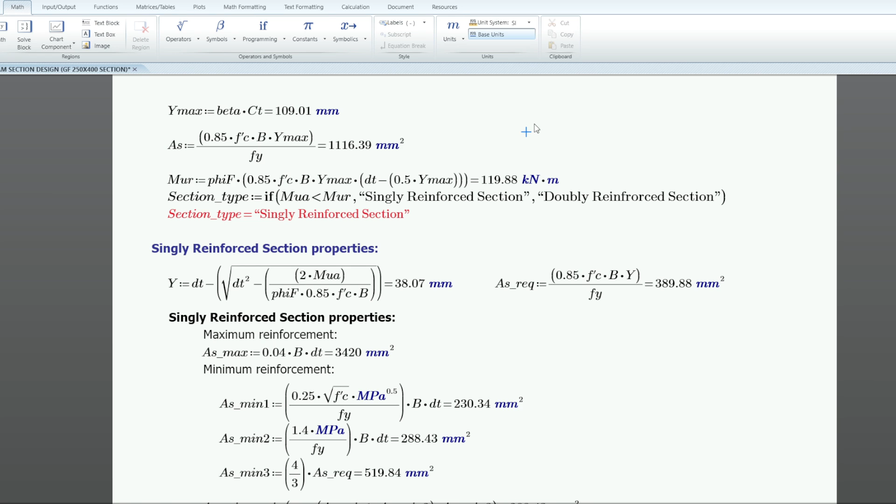So this is the phi, the reduction factor of flexures. Times natin yung 0.85 f'c times B times Ymax. Then, of course, the difference of this value, dt minus 0.5 the Ymax. So ito yung 119.88 kilonewton meter.

Then para natin ma-check yung section type, kailangan natin makuha yung MUR, which is ito. Then i-compare natin sa MUA, which is the actual applied load. If the MUR is greater than MUA, singly siya.

Pero kapag yung MUR na yan, ginanyan ko lang yan, dalawang condition. Kasi nga, nakasingle lang tayo. Pero kapag i-calculate natin yung doble, dapat tatlo yan.

Kasi dapat yung MUA na yan, kapag yung MUA value is within the limit of the MUR, tapos may MU max pa yan eh. MU max, doble siya. Pero kung mag-greater than sa MU max, ibig sabihin, failed na yung section mo.

But for this tutorial, singly reinforced section tayo. Okay, ayan, so every time automatic yan, yung section type natin, mag-update yan, singly or doubly. Okay, para sa singly reinforced section properties, so ito yung formula natin.

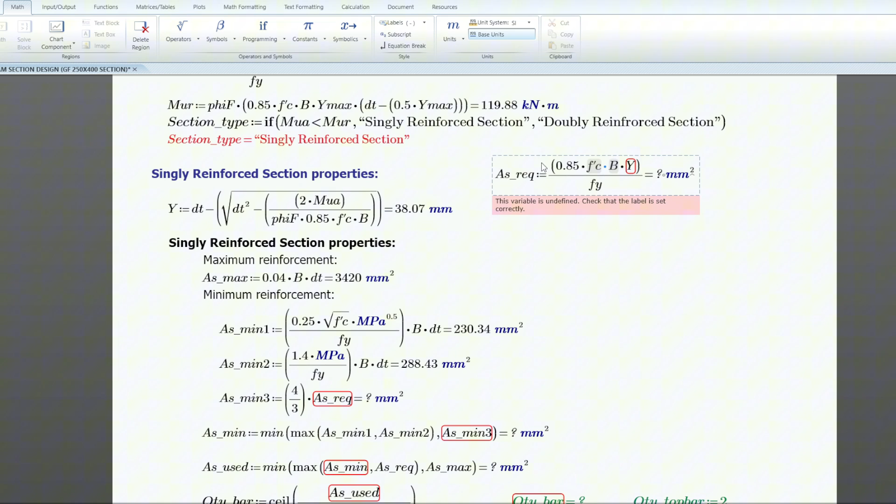For example, for this As required, kapag ilagay ko to, hindi siya makakalculate kaagad. Kasi nga, mas nauna siya compared dito sa Y. So dapat magkasunod siya or sa baba pa siya nakalagay.

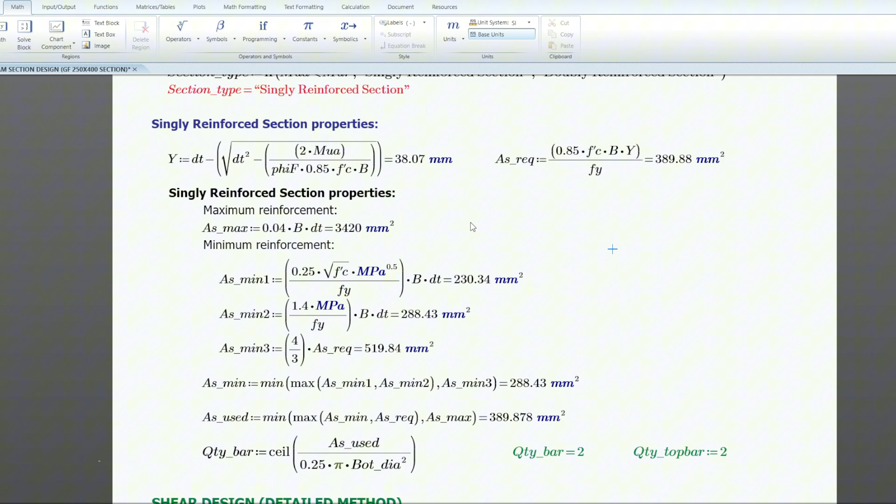Para mag-auto-calculate siya. Now para sa reinforcement properties, for the maximum area of steel in singly reinforced section, of course, four percent yan ng effective area. Okay, then the minimum, of course, is for the ACI. Mayroon tayong tatlong minimum yan.

Isang minimum natin is 25% ng the square root of f'c over the Fy. So as you can see, mayroon tayo dito, nilagay ko siya megapascal raised to 0.5. Kasi originally, wala to eh, wala yan sa formula. Pero alam naman natin na f'c is megapascal.

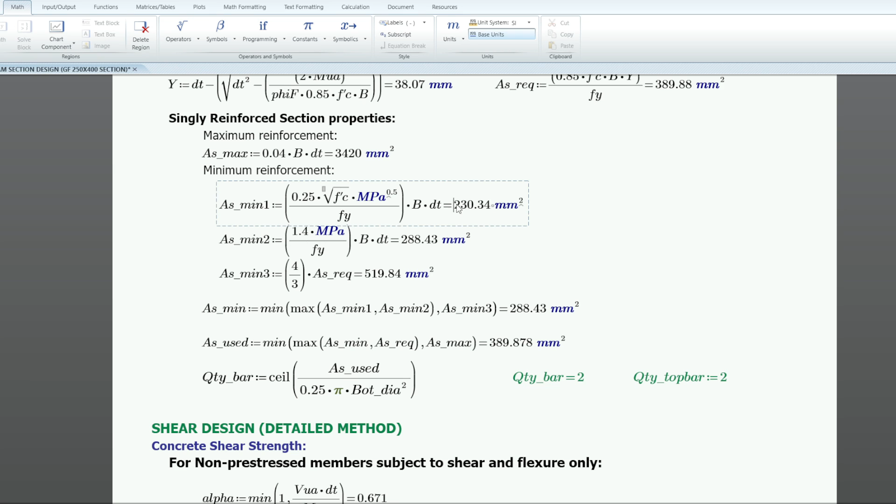So kapag ano natin yan, iba yung magiging result. So kailangan natin mag-introduce ng units para makuha natin yung tamang result. Okay, pero hindi natin yan ina-alter. Ito talaga yung actual na unit niya. Hindi lang naka-indicate dun sa original equation na kinakopy natin.

Then para sa As-min, the minimum bars is 1.4 over Fy. Then lagyan natin yung MPa para maging mm² yung result natin. Then ito pa pala, product of B and DT. Okay?

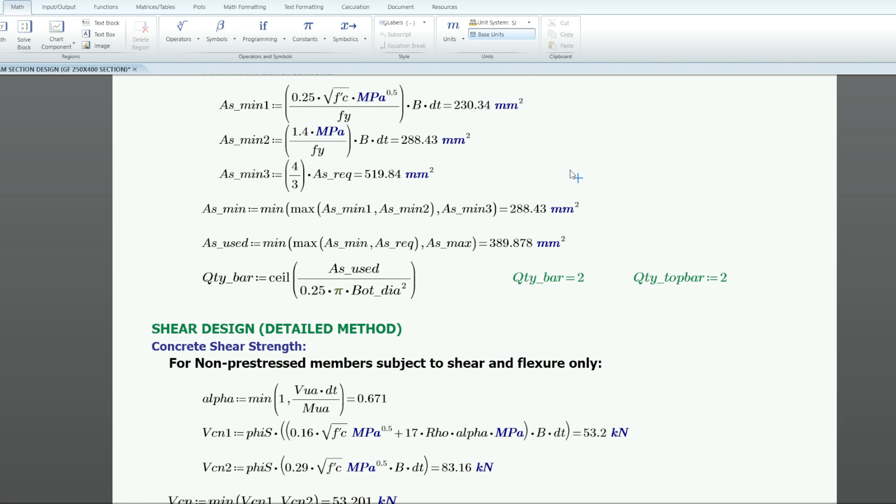The other minimum rebar is the 4/3 of the required area. Then para makuha natin yung ES-min or the minimum reinforcement, that is the maximum or the minimum of the As minimum 1 and As minimum 2. So kapag makuha natin yung maximum dyan, kukunin naman natin yung minimum ng value na yan then sa As minimum 3.

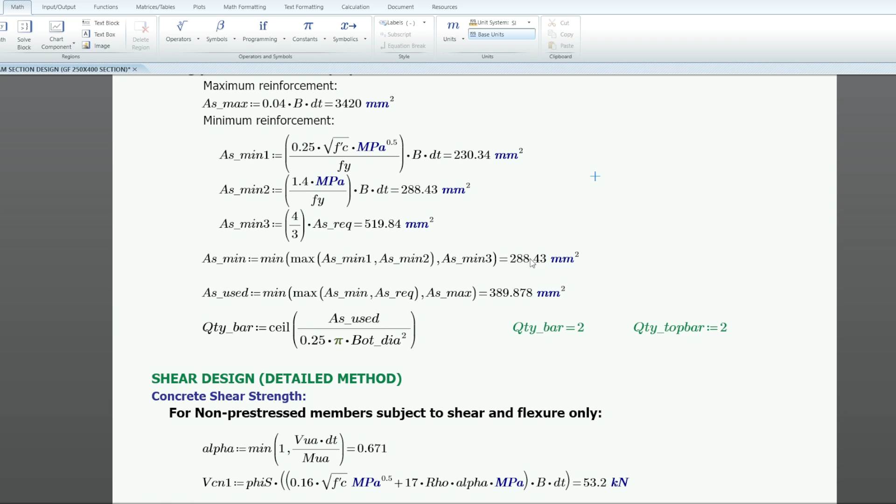So kapag ma-check na natin yan, maglalagay na tayo kung anong gagamitin natin. So i-set na naman natin yung maximum and minimum reinforcement and compared to the required reinforcement, kukunin natin yung maximum ng As-min and As required. Then after that, kukunin natin yung minimum of the maximum of this value and the As max.

Okay, then makuha na natin yung quantity ng bakal sa tension part. So para makuha natin, divide lang yan, yung As_used over the area of the diameter na bakal. Area ng bakal natin na gagamitin. This is the formula ceil para makuha natin yung round up whole number.

So as you can see, ito naka-equal kasi nga naka-formula na tayo rito, naka-semicolon, colon equals. So kapag i-copy ko to, kahit saan mo siya gamitin, equal na lang ang ilalagay mo. Palagi may value na yan.

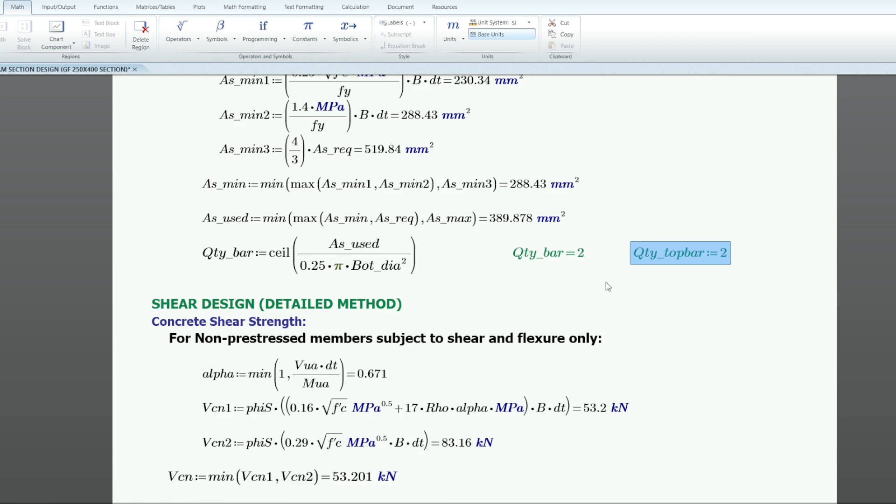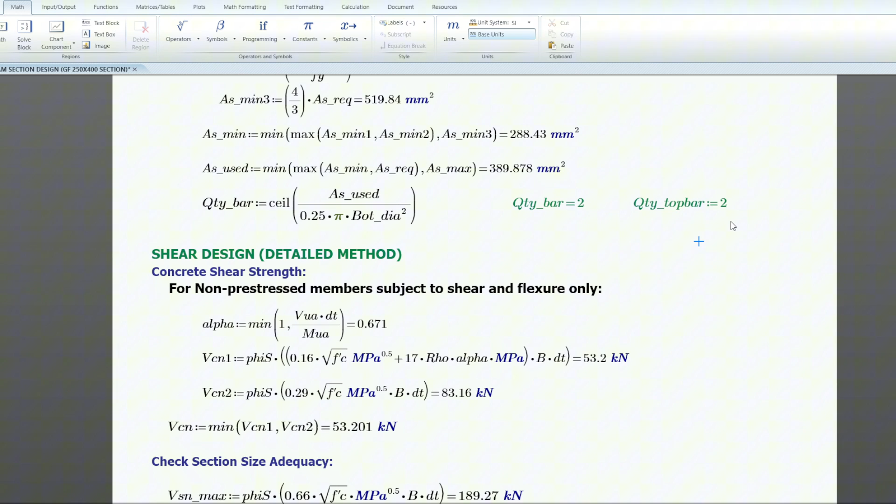Okay, so ito kasi yung top bars natin, nilagay ko lang siya. Then mapapansin ninyo, naka-colon equal pa siya, ibig sabihin first time yan na ginamit. Okay, so originally, this is only our result, yung 2 bars na requirement. So nilagyan ko na lang ng top bars para sa minimum na number of bars ng bawat section.

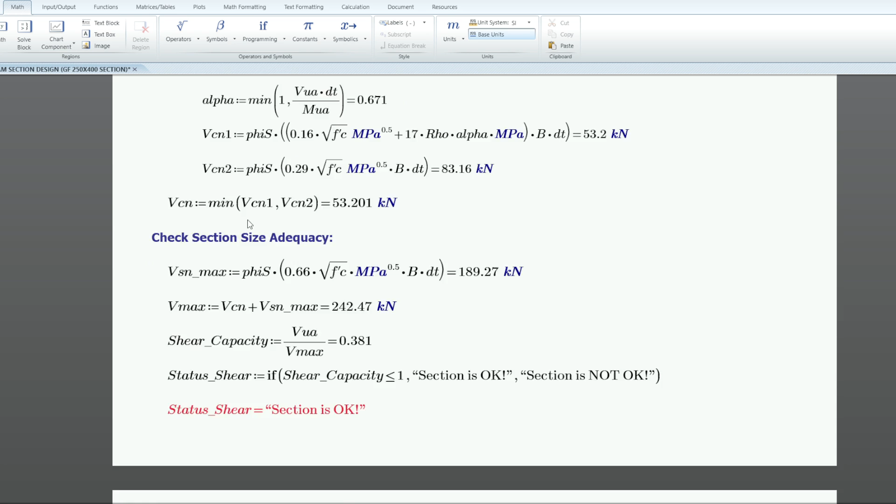And of course, para sa shear design, gagamitin natin is the detailed method. So may isang method pa yung simplified method. Instead na gagamitin yung MUA, then the steel ratio, direct lang yung pure, sinasabi nilang pure shear lang.

Okay, for the non-prestressed member subject to shear and flexures only, ito yung magiging VCN natin, the capacity of the concrete, which is the minimum of the VCN1 and VCN2.

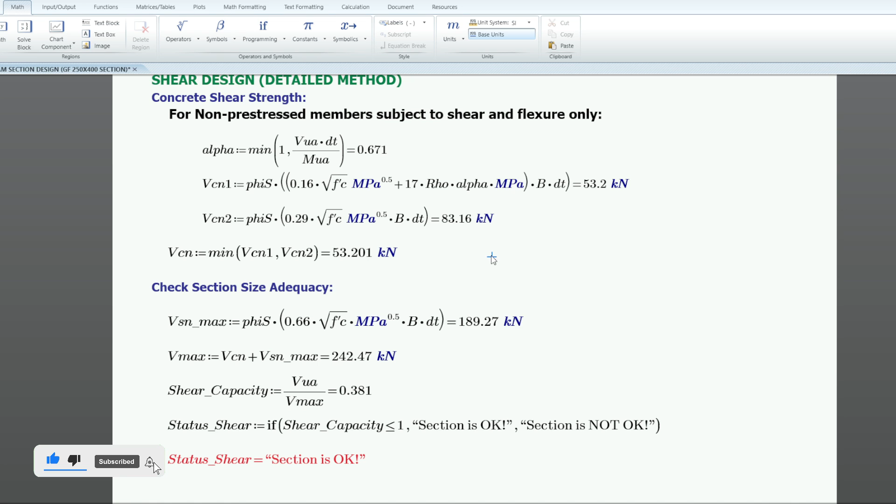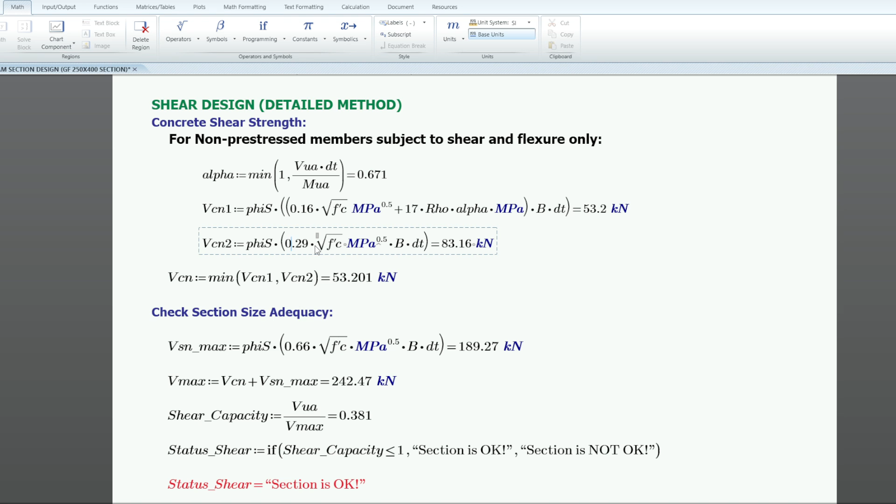And yung VCN1 natin is the reduction factor of the shear times 0.16 times the square root of f'c plus 17 times rho alpha times BD. Then yung VCN2 naman natin is the reduction factor of the shear times 0.29 times the square root of f'c times BD, and this is the result. Then kukunin natin yung minimum ng dalawa, ang VCN1 and VCN2.

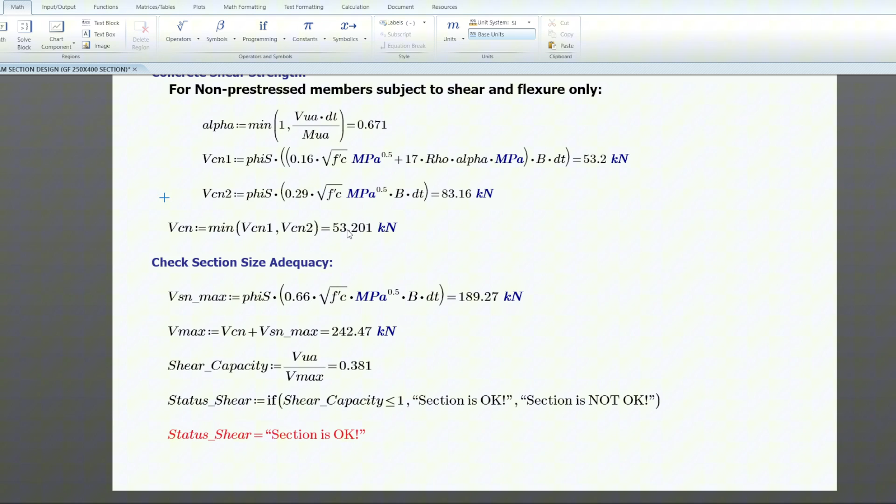Then check natin yung section adequacy of our member. So ito yung VSN max, kukunin natin yan, and makukuha na natin yung maximum shear na pwede magamit natin. So VCN plus the VSN max. So ito na yung maximum natin.

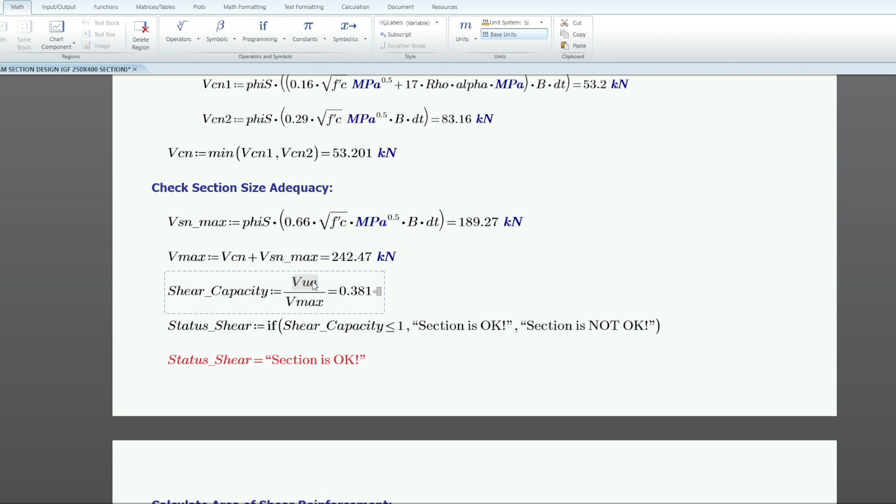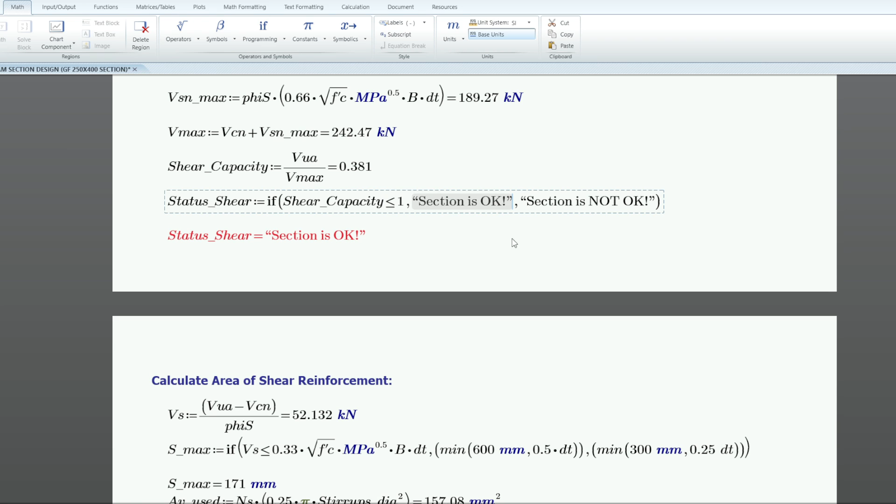Then, of course, the shear capacity, i-divide natin yung shear applied load over the Vmax. Then ito yung capacity natin, capacity ratio ng shear. Then of course mag-status tayo. If the shear capacity is less than or equal sa 1, okay yung section natin. Pero kung hindi, not okay siya.

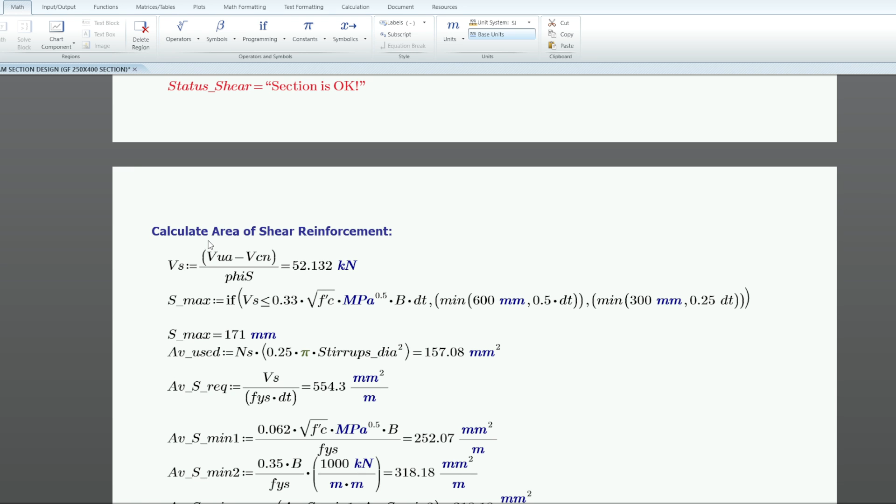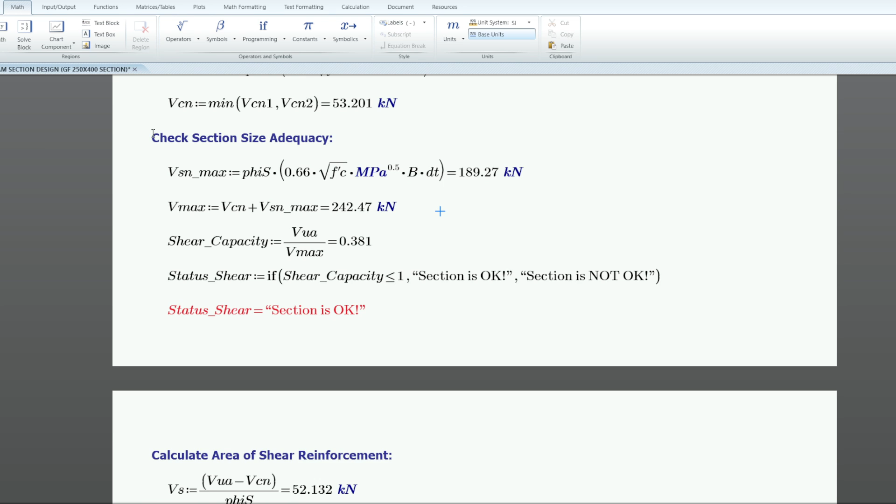Then, calculate the area of shear reinforcement, Vs. So kung mapapansin natin dito is 242.47. Yung VUA natin, anong value? Equals... so 92 lang yung VUA. So ibig sabihin, kayang-kaya na i-carry ng concrete natin yung shears.

Pero papasok pa rin tayo dito sa minimum as per the code. So pero check pa rin natin yung minimum and maximum reinforcement. So kapag i-minus natin to,

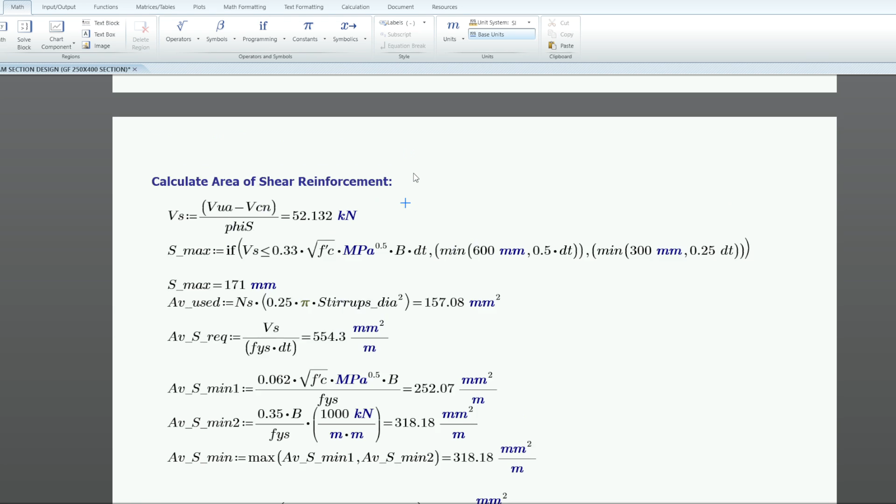Vcn, meron pa rin. Kung titingnan natin yung Vs para sa steel, yung BCN natin, tingnan natin yung Vcn. Ang Vcn natin is 53. Tama. Then VUA, check natin kung mas malaki pa to. Pag mas malaki yung VUA sa concrete strength, ayun, mas malaki nga yung VUA. So ima-minus natin yan para makuha natin yung shear na i-carry ng reinforcement. So 52.13 to. Then i-check natin yung maximum na spacing.

So if Vs daw is less than or equal sa 0.33 the square root of f prime c times B dt, minimum ng 600 at 0.5 times the effective depth ang gagamitin natin. Okay? If not, minimum ng 300 at D over 4 yung gagamitin natin. So therefore yung S max natin is 171 mm.

So yung Av used natin, so of course, quantity lang yan times the area of the diameter of the stirrups. Ito na yan. This is Ns, this is the number of the legs. Okay? Then para natin makuha yung area required in terms of millimeter squared per meter, so Vs over Fys times dt lang yan.

Then check natin sa minimum. May dalawa tayong minimum. It's 0.062 times the square root of f prime c over Fys. Ito pa, times B. mm squared per meter.

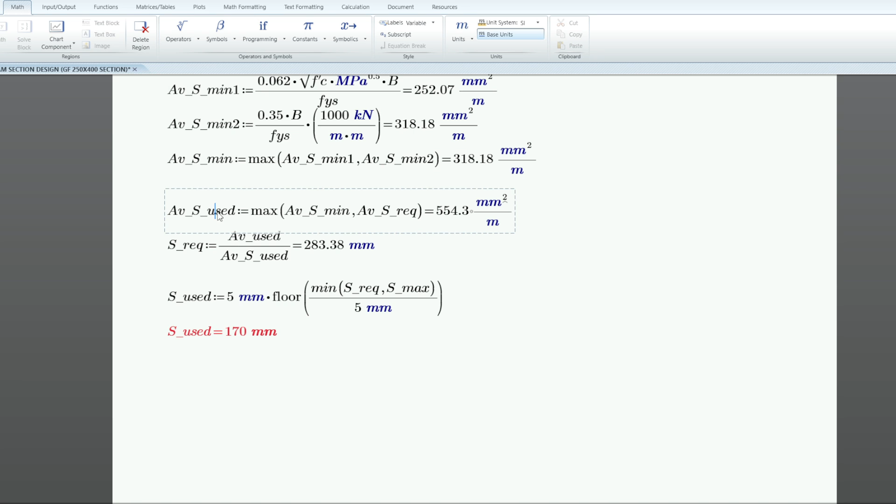Then of course, for the area minimum natin in terms of millimeter square meter per meter, kukunin natin yung maximum ng min 1 and min 2. Then pagkatapos, ang gagamitin na nating area in terms of millimeter squared is the maximum of the minimum and the required area.

And makukuha na natin yung required, which is the spacing. So kapag makuha na natin yung AV used, itong ginamit natin, divide lang natin sa makuha nating value rito. In terms of millimeter na yung result. Then i-compare natin yan yung S required.

Kung makikita natin, 283 yung requirement. Pero i-check natin yan sa minimum and the maximum. So yung S used natin, itong 5 floor, ano yan, kasama yan sa formula kasi nga, nirun off ko siya, of, ah, round down. Round down ko siya to the nearest 5 digit, 5 numbers. Okay? That is the minimum that is required and that is max.

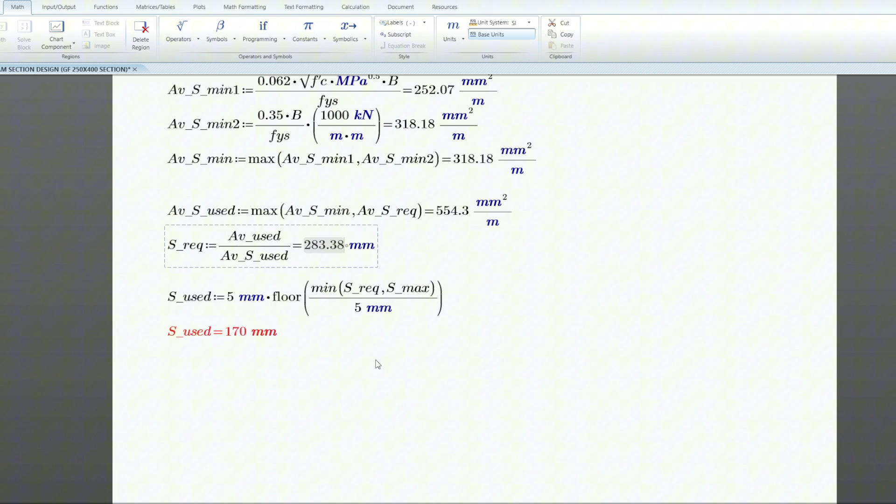Kung makikita natin yung S max, 171. Yung required is 283. Okay? So naka-round down siya up to the 5 mm or 5 digits. So kaya 170 mm yung spacing natin.

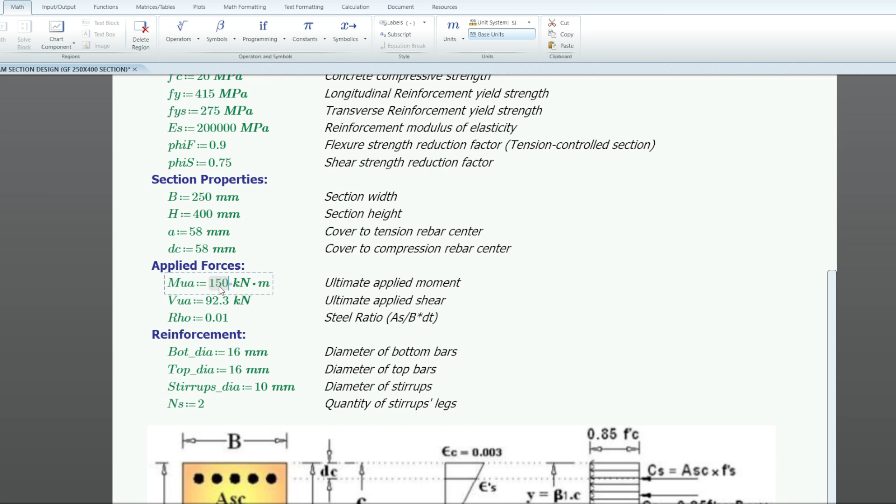Ngayon, so kagandahan dito, every time mag-change kayo, for example, palaki natin to ng data, let's say 150. Check natin dito, doble na siya. So ibig sabihin, hindi na siya applicable nito kasi single lang to. May ibang solution pa dun kung double reinforcement. So let's use 125. Kung 125, doble pa rin. Bawasan natin to as 100.

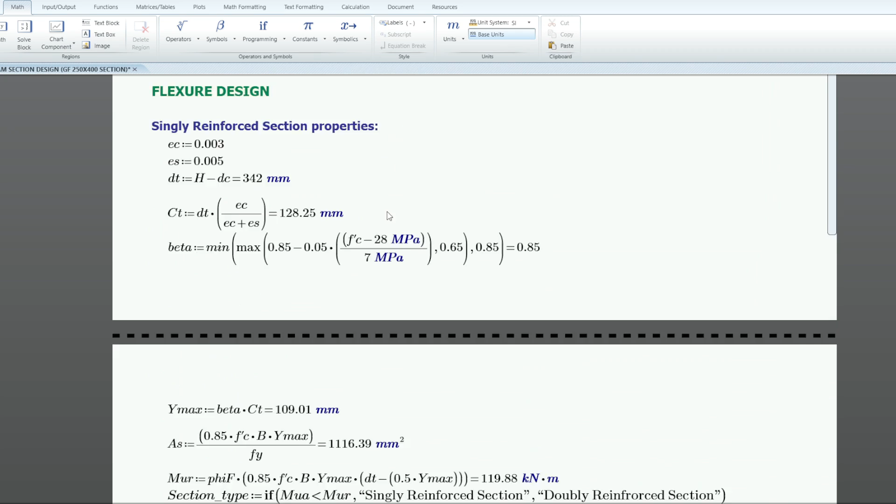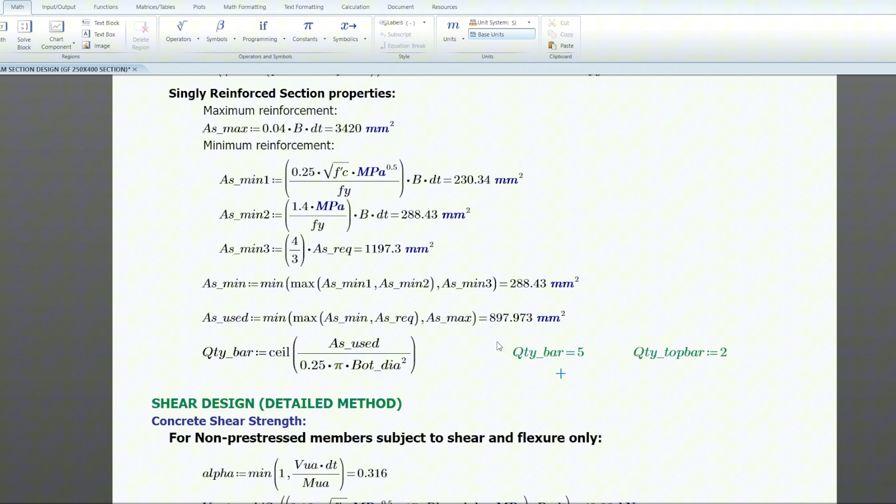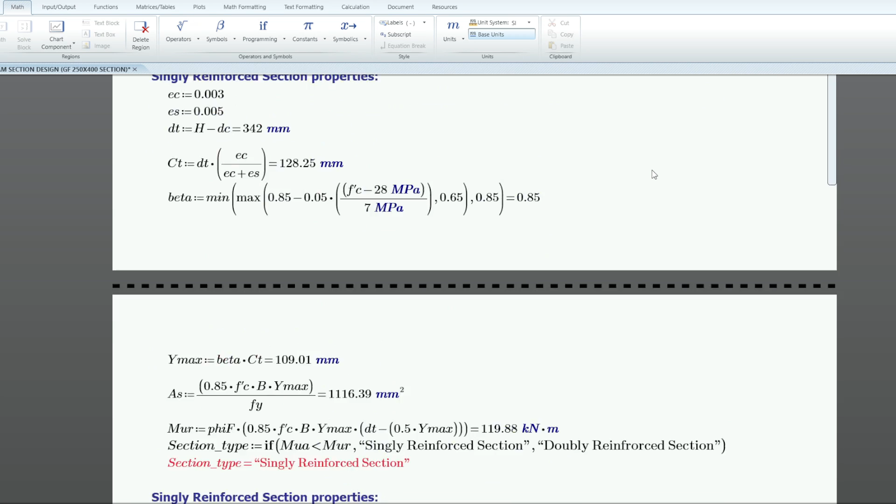Ayun, single siya. Then ang magiging bakal natin is ito. 5-16. So kapag i-change natin yan yung diameter natin, yung bottom bars natin ito 25, dapat mag-reduce yung 5 na yun. Ito, naging 2 na lang. So kung 20, ito medyo maano lang sa 3.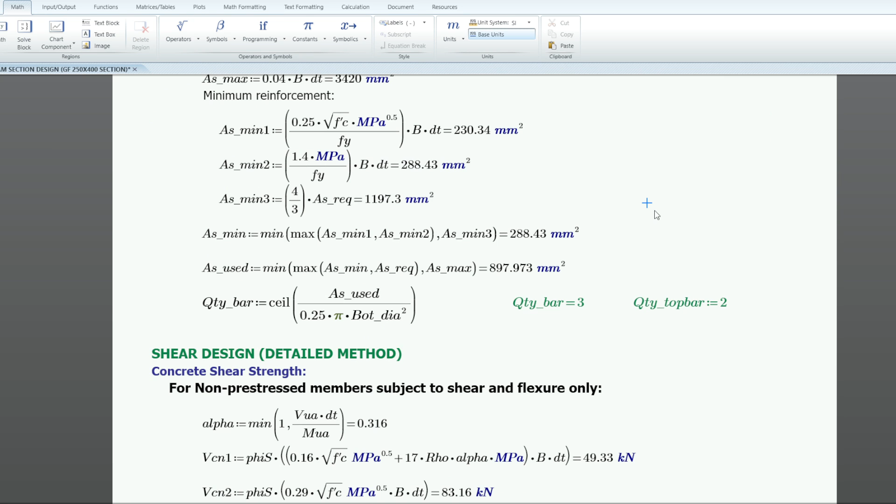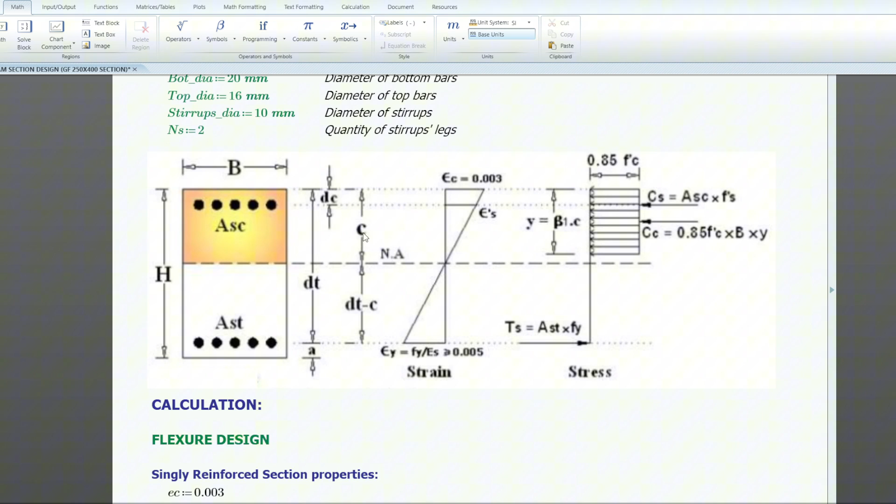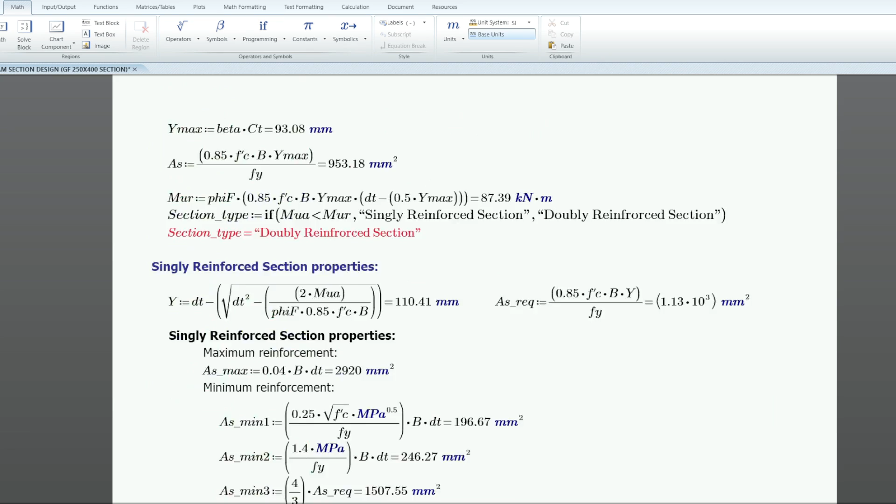Sa Mathcad kasi nga, hindi siya, yung result, hindi natin pwede dalhin dun sa taas kasi hindi siya makakalculate. And for the shear naman, try natin to change to 100. It's 70 pa rin. And let's use this one to 350. And check natin. It's 145 na.

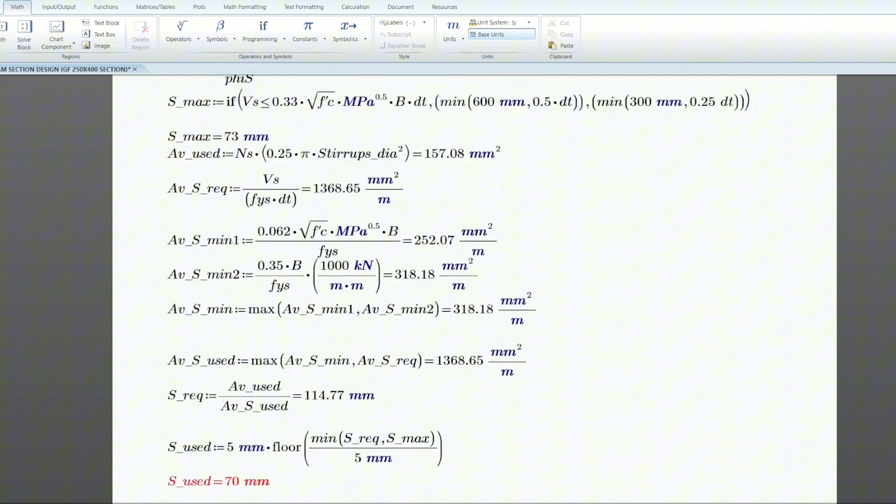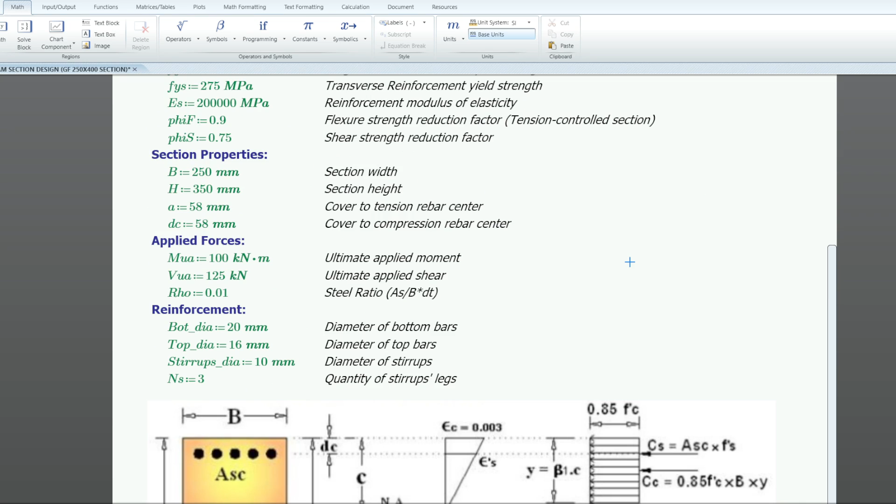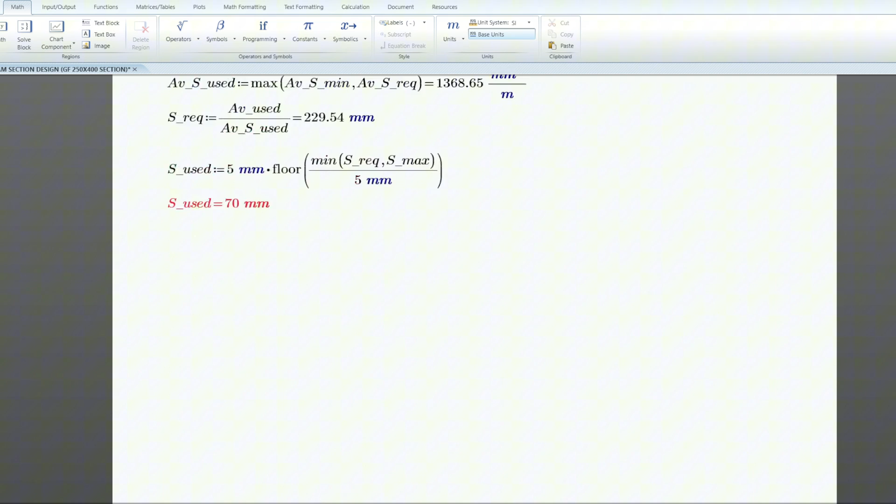Palaki pa natin yung shear to 125. At 70. So pwede yan, 70. Pwede na yan, try to increase the number of legs. It's 3. 70 pa rin. Let's use 4. Naka-minimum kasi siya. Yes, hindi na siya mababa kasi minimum. Ito, maximum na siya. Okay.

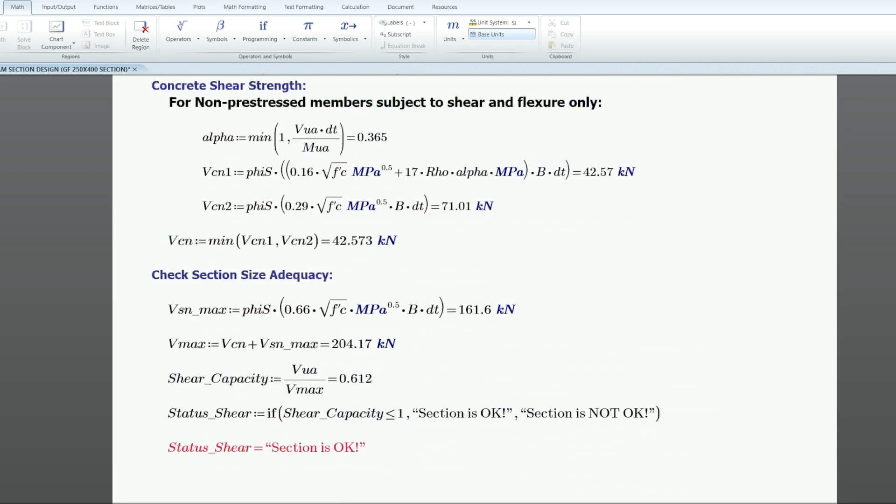And yun, tapos na tayo.

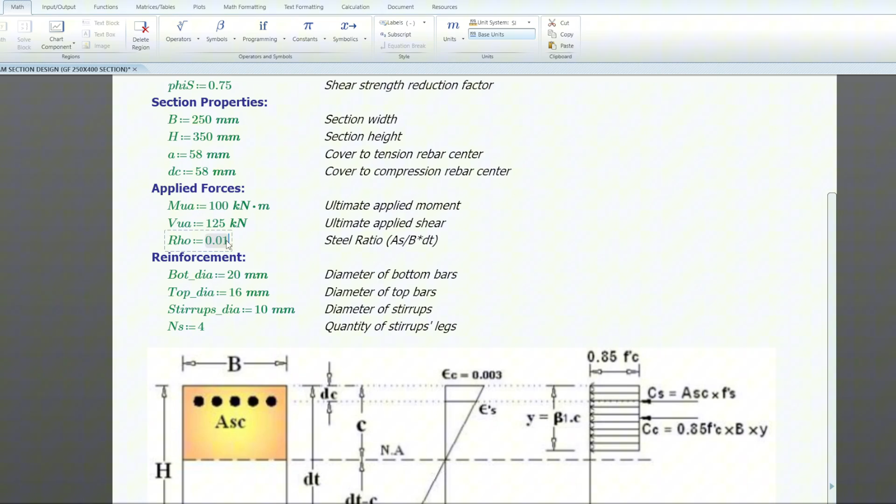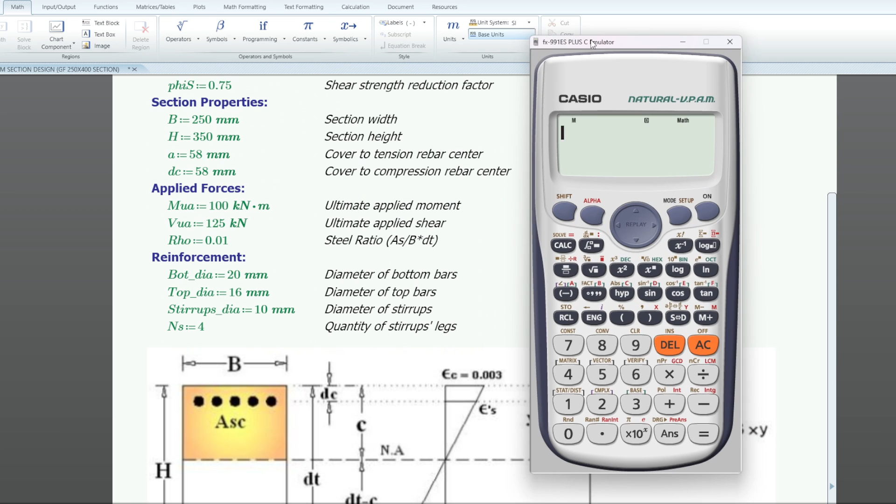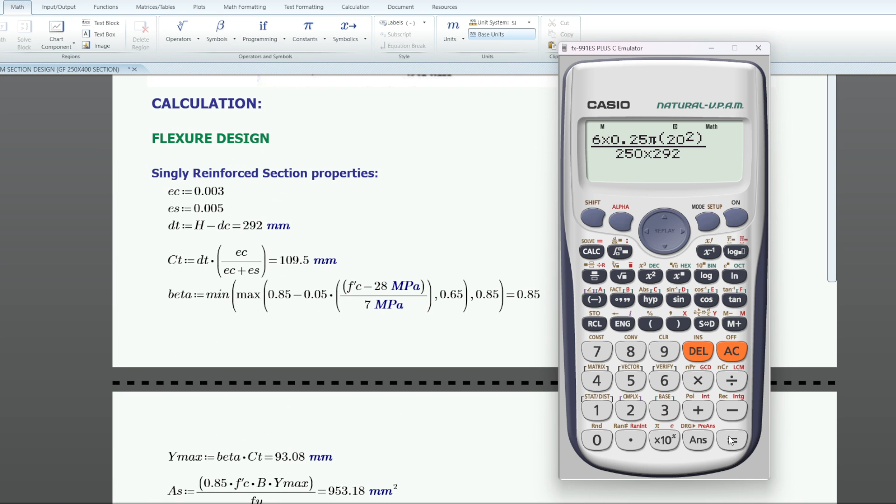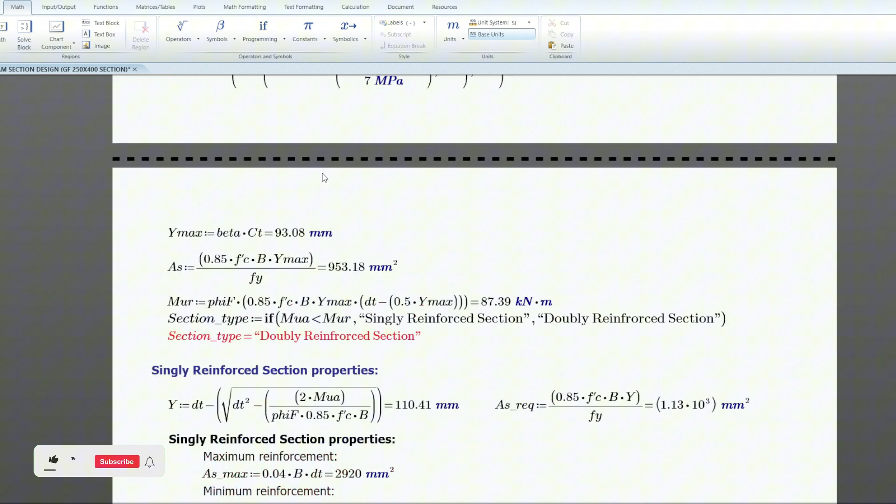By the way, dapat i-change niyo yung rho ninyo. Yung rho, ito, for example, nag-4 na siya. 4 na siya, then may 2 tayo sa taas. So kailangan niyo yan, kunin yung reinforcement ratio. So meron tayong wala niyan. 4, so 6. 6 times 0.25 pi d squared, which is 20. This is the area. And B natin is 250 times the effective depth is 292. It is 0.0258. Ayun, so makikita natin dito, same pa rin.

Pero yun, at least na-update siya. Yun, so far, yun lang guys.